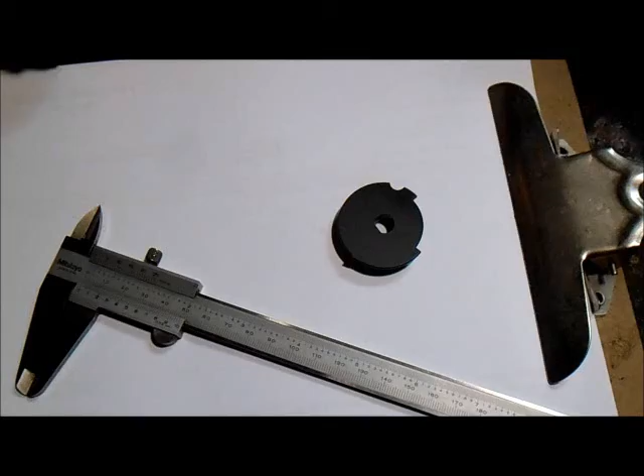Today we're going to look at making a part for the dimmer switch, which goes in behind the headlight switch on a Ford Falcon EL. The small little knob has broken off, so we're going to see if we can make this today.

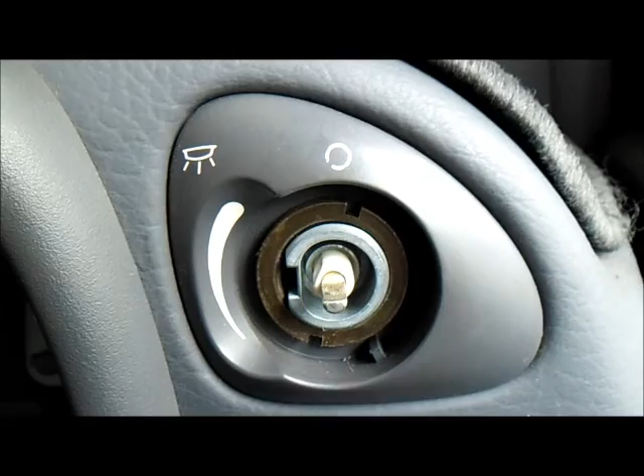This is the light switch here. I already repaired the main light knob. It actually goes in behind this knob. The part we're going to repair actually goes on to the white part there. It just slides on, actually goes this way, slides on like there, inside there, and then the little knob is to move it up and down.

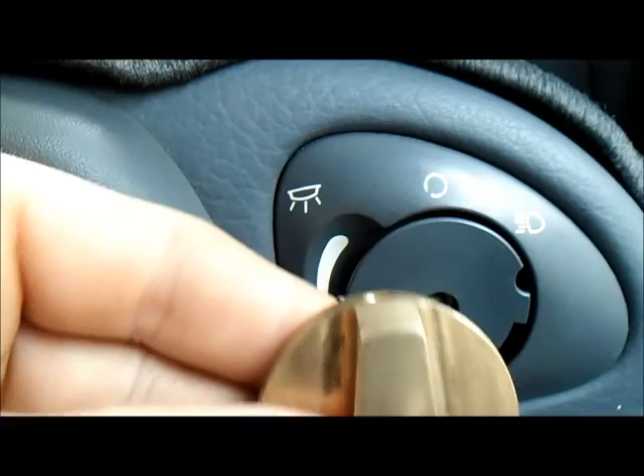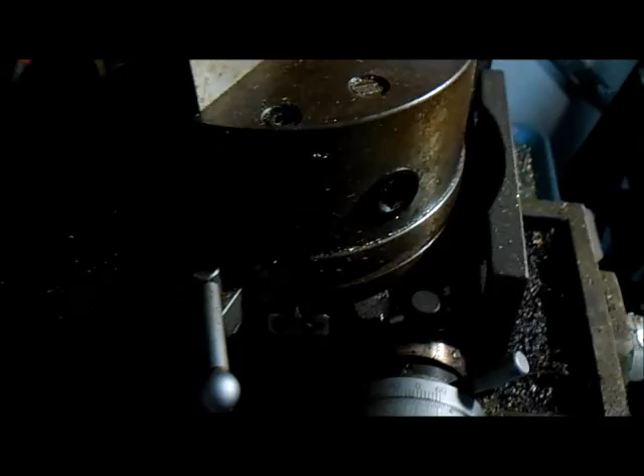Actual light knob. I machined this up so that I had a grub screw there to lock onto the flat that's just there, which allows me to turn the lights on. Now I've moved to my milling machine. I've set it up on my rotary table. I set my rotary table to 0. I don't know whether you can see that. It's on 0, right? 0 there.

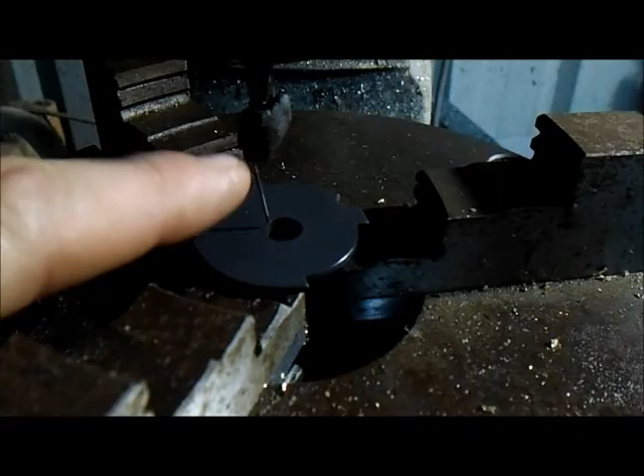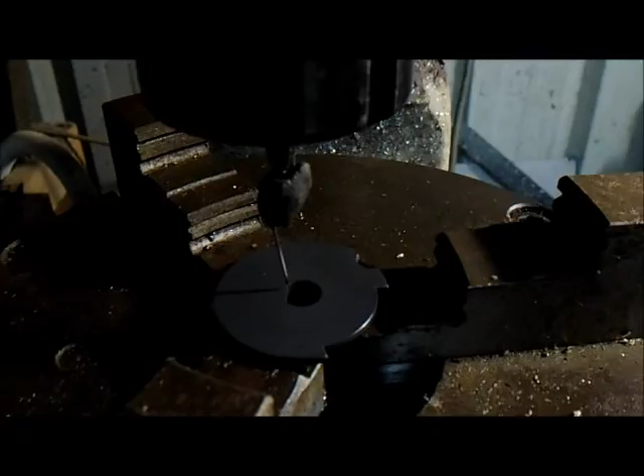So what I've done is I've set my needle on my tool and centralized the needle, right? And I've wound the table in and out so that I can get the flat section in the center there to 0. All these cutouts seem to be pretty nominal. This cutout here is clearing a little tag that's on the switch. The round sort of a cutout there, I think that's just so you can pull it out, and obviously we have our little knob over here.

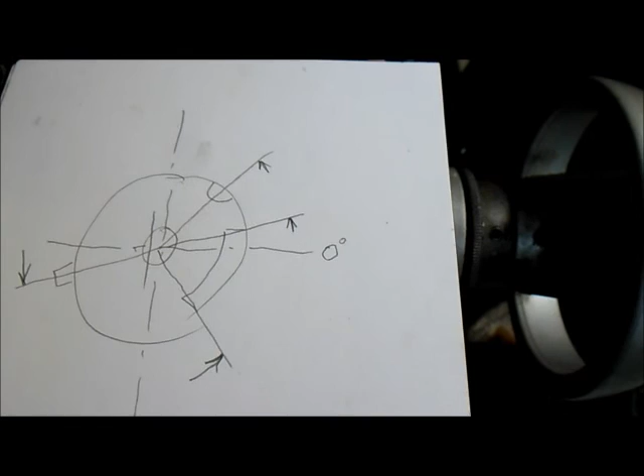I've moved out to the side of my job now, and I'm going to start getting my positions for the slots. Basic little drawing here. I've got my 0 point, 0 degrees, and I'm going to go around and pick out all the center lines and the end points, and then at the end, when I put my job back in, I'll have those points. Let's get our positions now. Bring that around now, get our first position, just about there, 10 degrees. So just right, that'll be 10 degrees here.

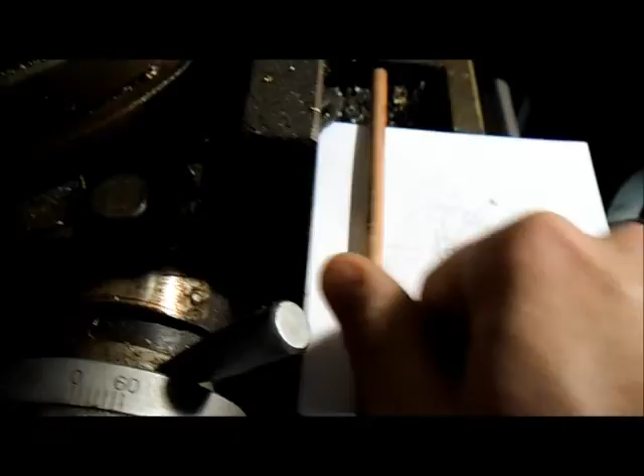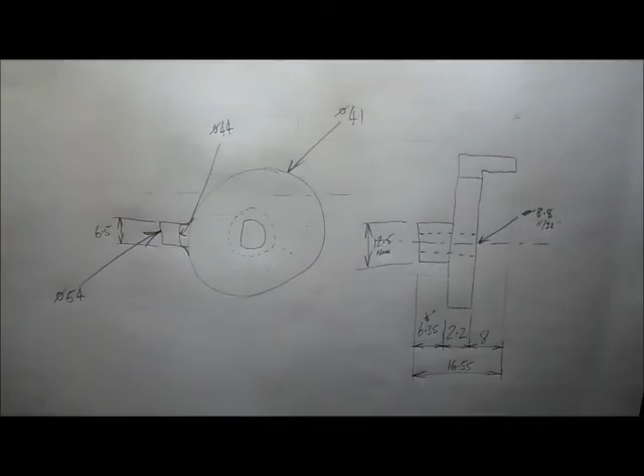Alright, and then we'll go to the next one. Okay, center of that is, that's about 40 degrees. Go around to our next one, which will be our knob. Somewhere in there, the center of that. Cross those. So that's about 200. And the start point of this there, that will class as 290. So now we have our basic degrees. Now I have my initial drawing here.

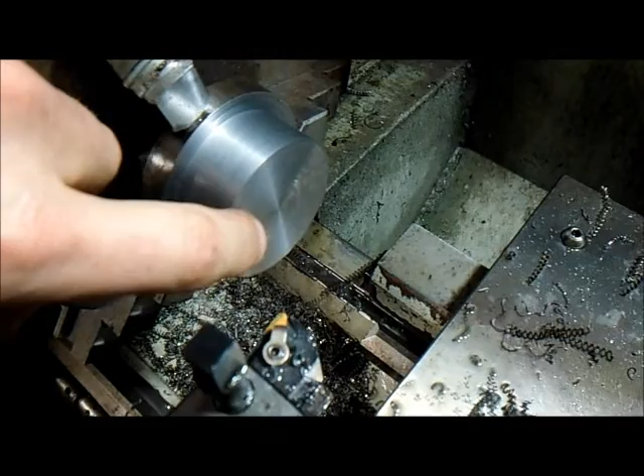Right, so I've got the part set up now. I've got a piece of billet here, roughed out my outside. That's going to be basically the outside of the little knob. So now I'll proceed to machine down and make my little back spigot part. Okay, what I'm going to do here is run down the face. I've zeroed out on my front face, and I've put a little line in where I need to stop, so I know basically where to go.

I'm just going to run down the face, just take cuts on the face, and that's still about 16 or something. We're going to go to 12. So basically we're going to rough the face out. Now we're all roughed out. We're going to look at doing the center hole now, so we can start finishing off this side of the job.

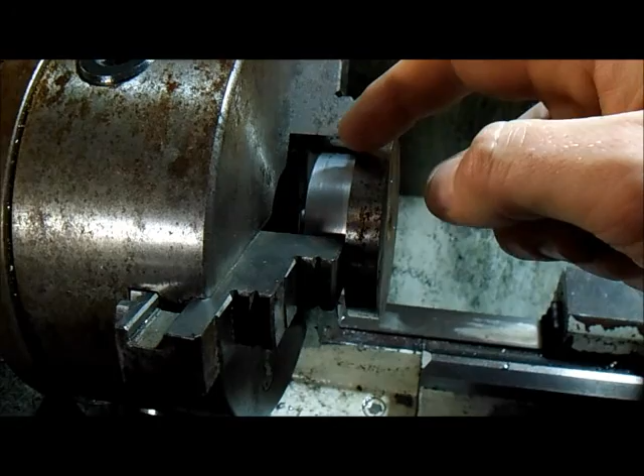So I've finished the other side now. I've turned it round and I've pushed it up against the jaws there to basically transfer the parallel of the job. Now what I'll do is I'll take off just about all this area here, probably about 99% of it, so I don't touch my jaws. And that will transfer the true face from behind here to the front, and that will allow me to pull the job out and true it up off that front face.

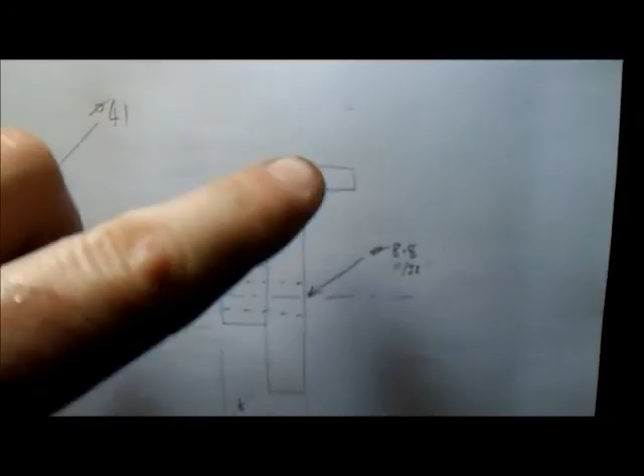I've now moved the job out from the chuck so that we can finish our length, start boring out the center for the recess for the little knob, which is what we're doing here, bore that out, and then we'll take what we don't need off, which will be around the outside here. We'll take that off on the mill.

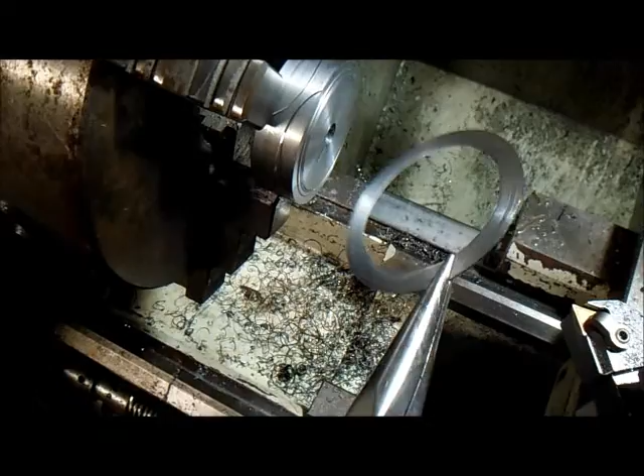A little tip for anyone out there: when you're machining off an edge like that, you don't actually try and machine off the full length of it. You machine till it gets pretty thin, and then you machine down around the area where it's going to pop off, and you'll see when it starts getting really thin, it starts wobbling a little bit. Then you just basically snap it off with your pliers, and that way it's not going to fly off and hit you in the head.

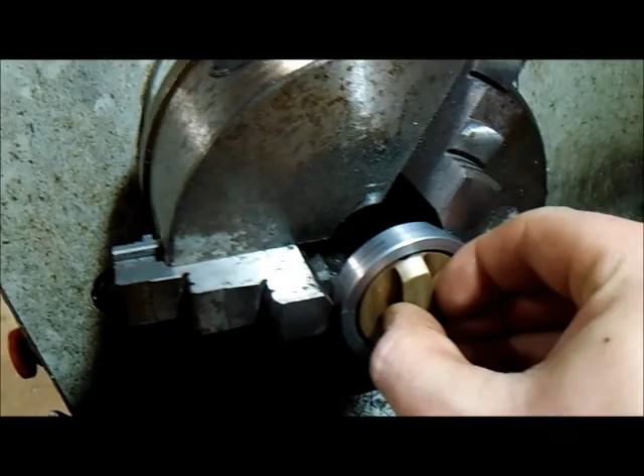Part's back to length now, and we're going to look at taking out this center bit now. I've roughed out the bore now. I'm about 0.1 off this face, and I'm about 1 mil off this face. What I'll do is I'll just dial indicate off my front face again, just to make sure it hasn't moved before I finish it. Part's finished now, and we can see here that we've got enough clearance there for the little knob to come around the side there and clear that, not be in the way.

So we'll head over to the mill. Got our job set up in the mill now, and we're going to put some small marks around the job so we can reference those and machine to them. It's got a small center drill set up there so we can start marking out our job. I've got it basically set up for the small D in the center. When we go to do that part, I've got some reference marks to weld a piece in there.

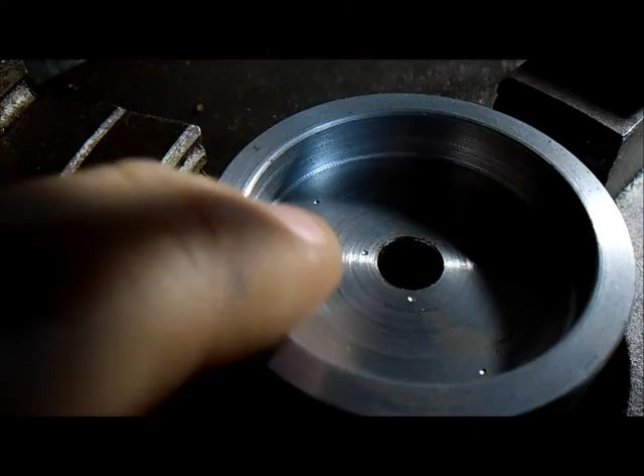So there's my reference marks for my D for the center. I've got two in the center there. I've got one on the outside here and one on the outside just there, and that'll allow me to get a line across there to re-zero it. When I do these, I'm going to have to put them on the inside like this one here when I go around the circumference of it.

Or if I put it on the top here, that's all going to get machined off. There's all our little reference marks there. A little bit confusing, I suppose, but we've got a little drawing there. We can work out where they all are. So what I'm going to do now is the point where the little knob we want to make, I'm going to put some spots on the outside here because we won't be machining that off, and that's the bit we'll be looking for up here.

There's our little marks on the outside there. I've put the center marks in. Then I worked out that the knob's about 5 mil wide, so that's about 6 degrees plus and 6 degrees minus. So I've put those little dots in there, and we can just machine up to them.

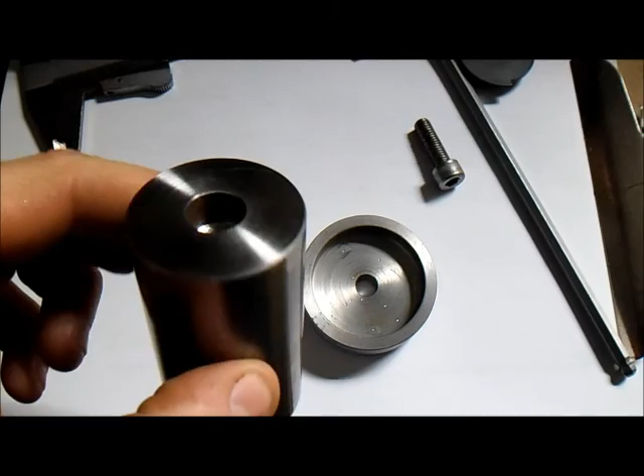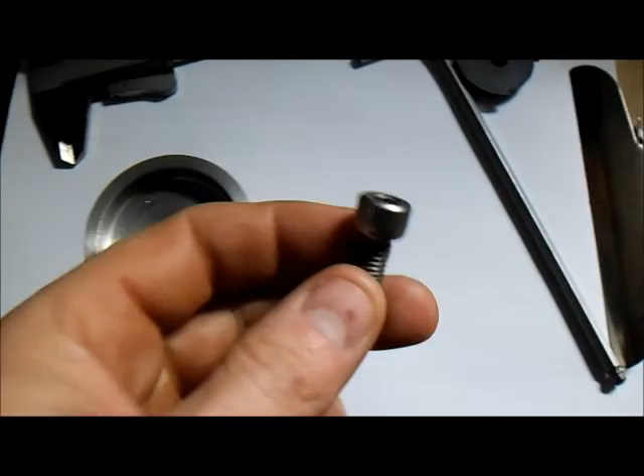Here's the jig we're going to use. It's just a piece of bright bar, and I've drilled a clearance hole in the top here and drilled and tapped M8 down inside there. That way our little spigot on the back here can drop into the jig, and then we'll just use a socket head cap screw down in there and lock it off.

I've put two little circles on the dots that correspond with our center D, so that way we know which two dots to line up on when we get our zero mark again. Right, our jig's in place now. We have a job set up to zero on our two center marks, which is one there and one over here. I've got it all screwed down nice and tight.

I've got a basic 2-tipped cutter, so we can chew this lip off basically up to our mark here where our little knob's going to go. Basically rough it out, take all that off the start. Now we'll put another cutter in, and we'll get our diameter around here for what we were looking for.

We've got the outside off now, so let's look at doing the smaller inside diameter. I've got about a 6mm cutter, so now we'll go around and do pretty much the same thing and get our diameter. Right, now here's a hot tip for any young players out there. I've got a diameter now. I've zeroed out my handle here. Now what I've got is 49.4mm on the diameter. I need 41mm.

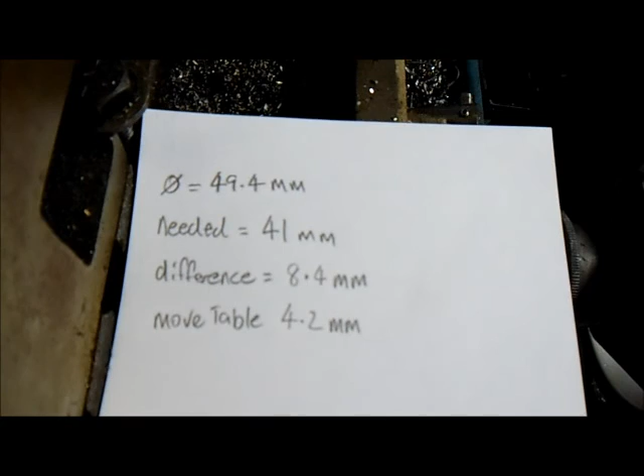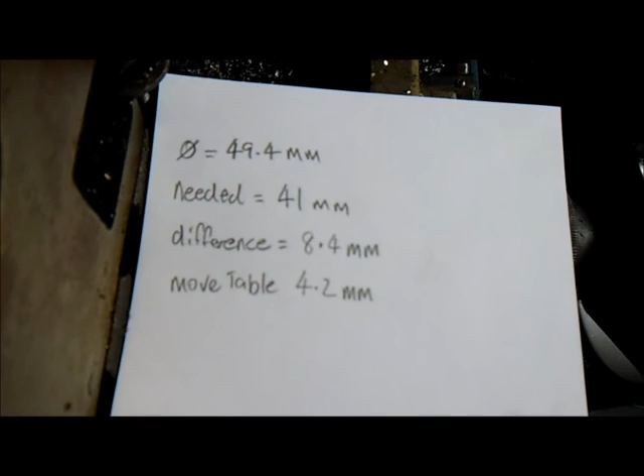The difference is 8.4mm. Now when you move your table, you only move it half because you're taking off both sides. Alright, so if you move that full 8.4, it'll take 16.8. Alright, so don't get caught with that and wreck your job.

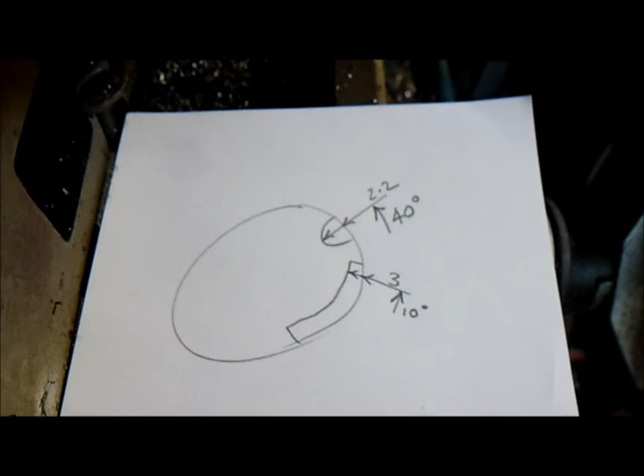Ready to do our cutouts now. We've got 2.2 deep on the small radius and we've got 3mm deep on our larger slot. I've zeroed out the machine on our diameter that we've just finished on, so that we can just move in those measurements and then we can just get our slots. Right, there's our little cutouts done.

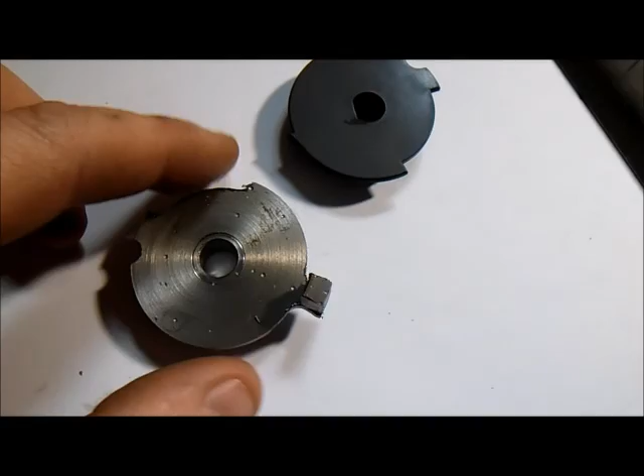Now what we'll do is we'll come around to the little knob there and see if we can tidy him up and get him to size, make him look a bit nicer. It's looking a little bit more like it now. I've tidied up the little knob area just so I didn't have so many dags on it. So we'll give that a bit of a deburr. Looks fairly good to the other part there. Give that a bit of a deburr and then we'll start looking at making the part for the D.

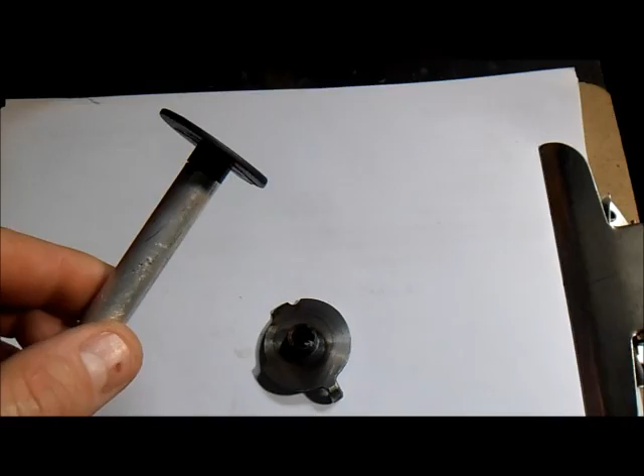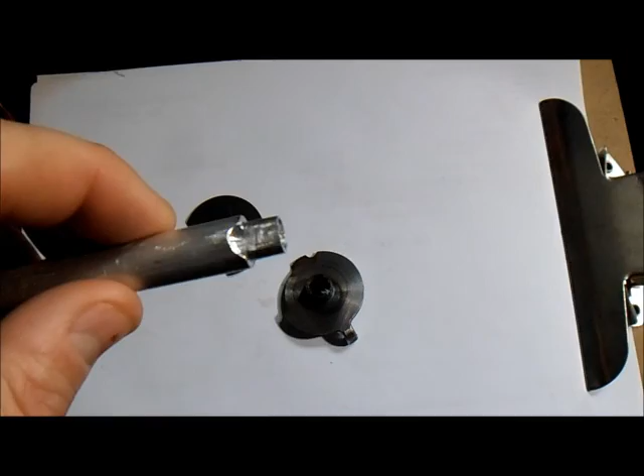What I've done now is I've machined a small shaft that fits into our original plastic piece. So I've machined that and put a small flat on it so that replicates what the car is. Now with our part that we're making, I've put a couple of bits of weld on each side so that I can file that back and basically fit it to this dummy shaft. Then I know it'll fit in the car.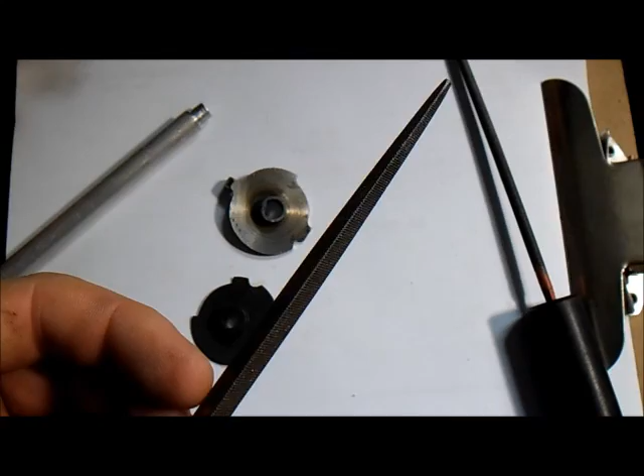I have the dummy shaft fitting on there now. It took about 5 minutes, which is pretty good. It slides on there quite nicely. Came out quite well. I've got our flat there now, so I'll just give that a clean up. Just used a small square file for the flats obviously, and I just use this round file to do the edges.

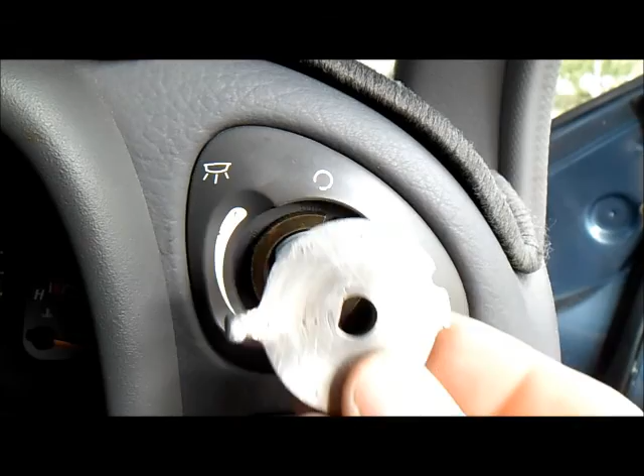Right, we're in the car, we're going to fit this part out, see if it fits. Yeah, it's nice. Alright, see if it works. Quite good. Put our headlight knob on. Okay, that's all clear, so that's really good.

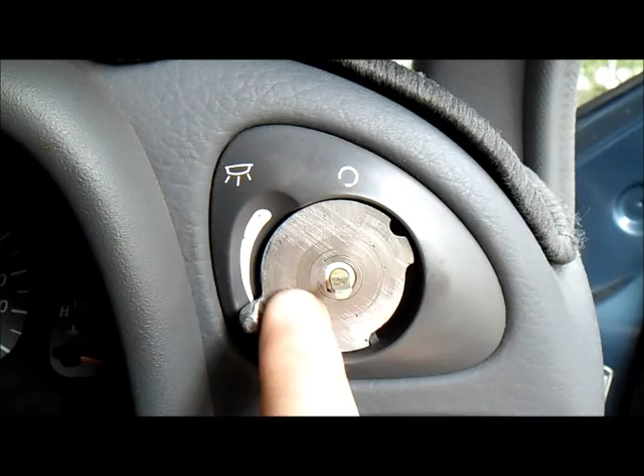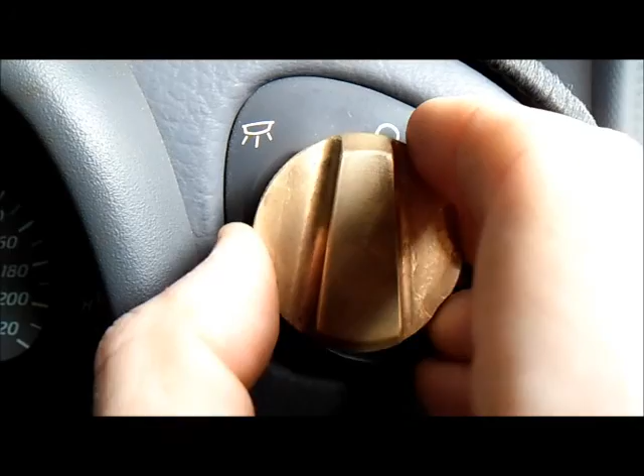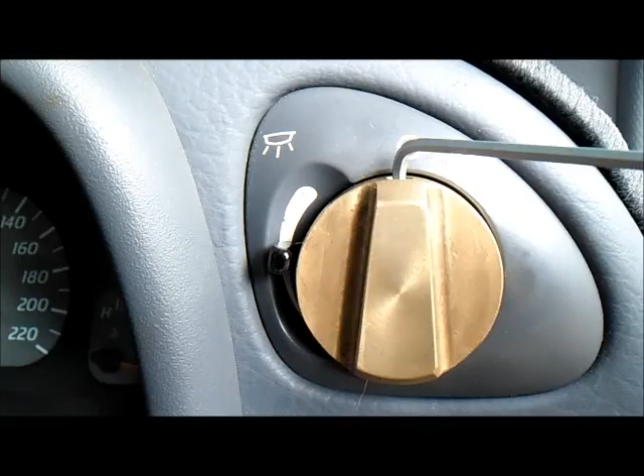I'll probably put a little bit of grease, just a real light smear of grease on here because we've got a bit of friction on the back side of our knob. Okay, it's all polished, so we can fit it up. A light smear of grease on there, you can see. This on there. And tighten up our grub screw. Okay.

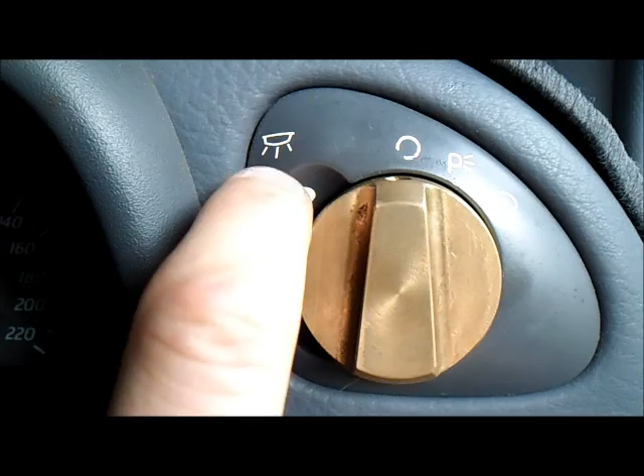Right, everything works. So that's how you make a Ford Falcon EL dashboard dimmer switch and internal light switch if yours is broken.